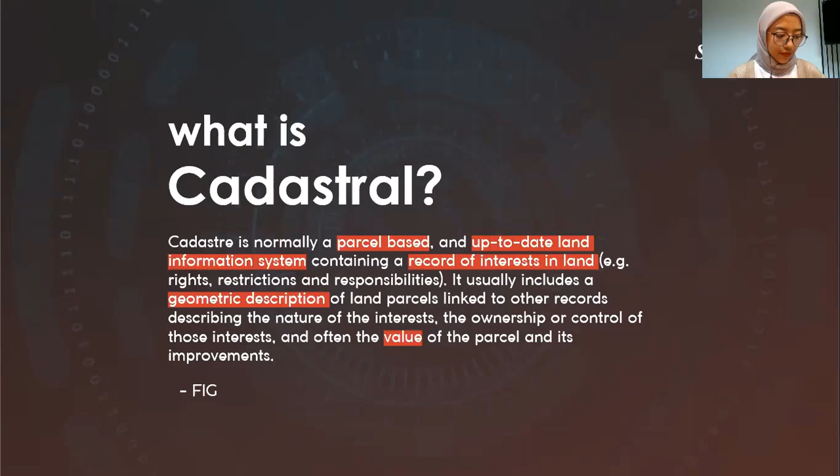So basically, in a nutshell, cadastral is about how you can keep information of your parcel, containing not only the geometric data itself, but also other important information such as the legal aspect. That's the first part about the definition of cadastral.

But the background of why we discuss this topic today is that during the last 2 centuries, population density has increased considerably, making land use more intense. This is shown by the number of population always increasing every year, and this trend has an impact on the increasing need for housing.

Humans also adapt by carrying out building developments both up and down, not only for housing but also for infrastructure, as seen in the picture with subway rail stations and other infrastructure. It is said that most land administration systems today are not adequate to cope with the increasingly complex range of rights, restrictions, and responsibilities in relation to land.

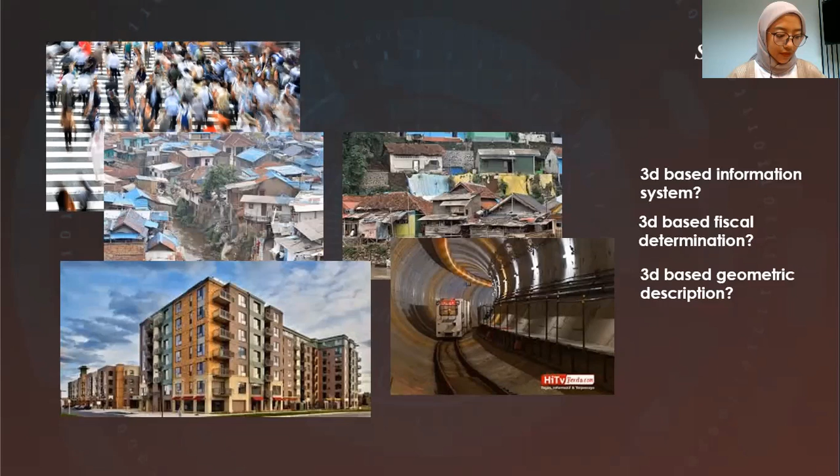Existing cadastres, which are still based on the 2D paradigm, need to be considered and adjusted to today's world, in order to answer emerged questions such as how we could cope with 3D-based information systems, 3D-based fiscal determination, 3D-based geometric description, and so on. That's why we need to move from the 2D cadastre to the 3D cadastre as well.

This will be our main discussion for today's topic. We will not discuss more about the theory, how to cope with 3D cadastre, or the legal aspect of 3D cadastre, but more on how we, as a GIS software provider, could give you a 3D digital cadastre model that will support your 3D cadastral concept.

This is our title for today's session: design and visualize 3D digital cadastral with SuperMap iDesktop.

The software we will use for today's session is SuperMap iDesktop, our desktop terminal product. But this one is special because we put our 3D cadastral plugin on it. You can find this product on our official website, but the one with the 3D cadastral plugin is only available in today's session.

For participants joining today's session, you could access this QR code. You could download our 3D cadastral plugin by scanning this barcode.

During the processing, we will use two different data sources. The first one is the drawing file, which is actually a floor plan drawing for each floor. Since we will create a 3D model, we hope you have your drawing file for each floor, not only for the first floor, so that we could achieve the 3D model.

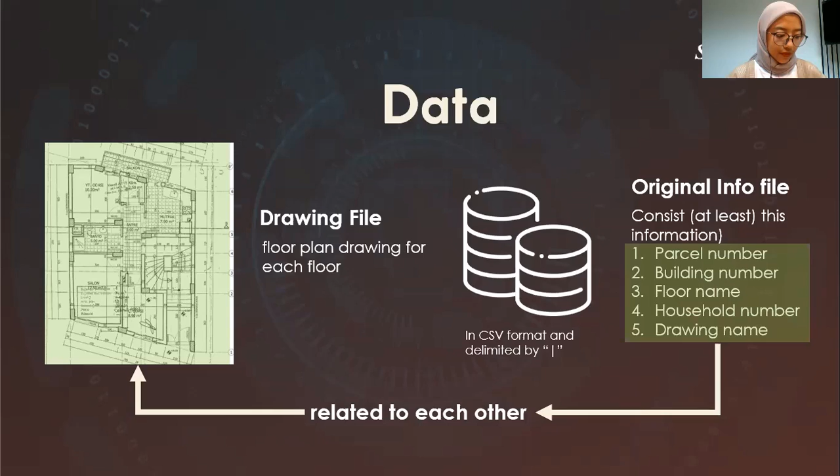The next topic is about the processing step. After you have prepared your data, we will do four processing steps. This is the general step, and after this I will show you the specific workflow for each processing step.

The first processing step is about data management. In data management, you will do data preparation and importing of the data. You need to make sure your data already fulfills the minimum requirements, such as having at least 5 pieces of information in your original info file, and that your drawing file is in TIFF format. That's all for the first data management step.

The second step is the digitization. After you import your data and make sure it fulfills the requirements and do some settings on it, you will go to the next step to do the digitization.

So here you will vectorize each object in your building, including the room, the roof, the door, the wall, etc. And you will also be able to put some information on it, the attributes for each object, such as in case you need to put the information of the legal aspect about the owner, etc. You could do that in this process.

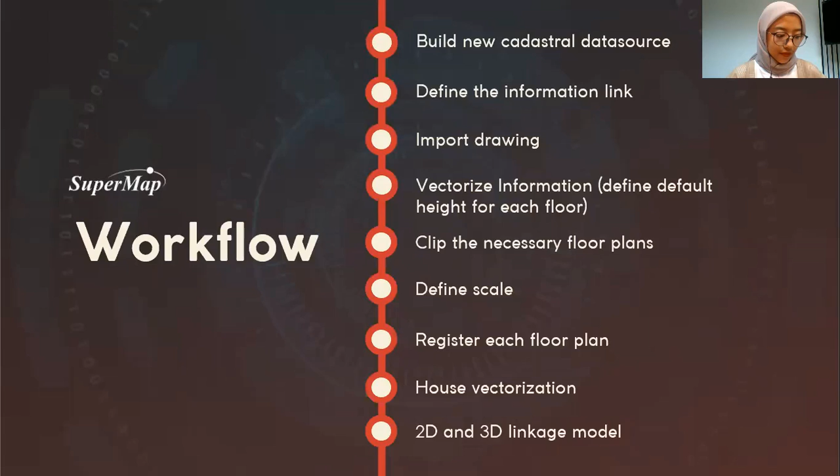Okay, but before I move to the SuperMap iDesktop, I want you to understand the data that we will use for today's session. I have explained to you about 2 data that we will use today. It consists of the floor drawing file and also the parcel information, or the original info file. The left picture is the drawing file that we will use today. It consists of 3 different drawings for the first floor, second floor, and third floor.

And you also need to have your parcel information that consists of at least these information: parcel number, building, floor name, household, room, and also the drawing. Please make sure that your drawing file is in TIFF format, and your parcel information is in the form of a CSV file, delimited by this vertical symbol, this one. And don't forget to make sure that your drawing file is in TIFF format, otherwise the software will not be able to detect your drawing file name.

Okay, so now we will go to the SuperMap iDesktop. I hope I could successfully share my iDesktop screen. Okay. So this is SuperMap iDesktop. We have used this from the first SMC until today's SMC, but what makes it different is that this iDesktop has the Cadastral Vectorization plugin, this one, which you will not be able to find in the usual iDesktop that we have shared on our official website.

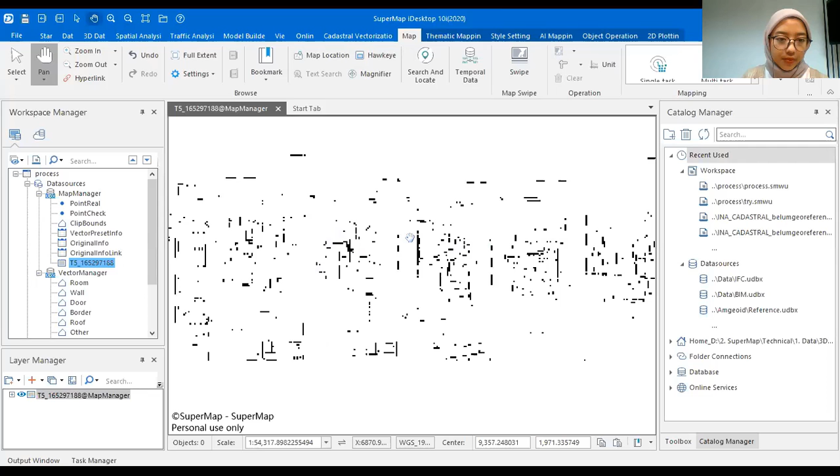Okay, next I will show you how our drawing file looks like. Okay, this is how the drawing file looks like. Actually, this drawing file doesn't only illustrate the first, second, and roof floor drawings, but it actually has the underground drawing, the first floor, second floor, the roof, and then the horizontal section, and etc. But for today's session, we will only use these 3 drawings.

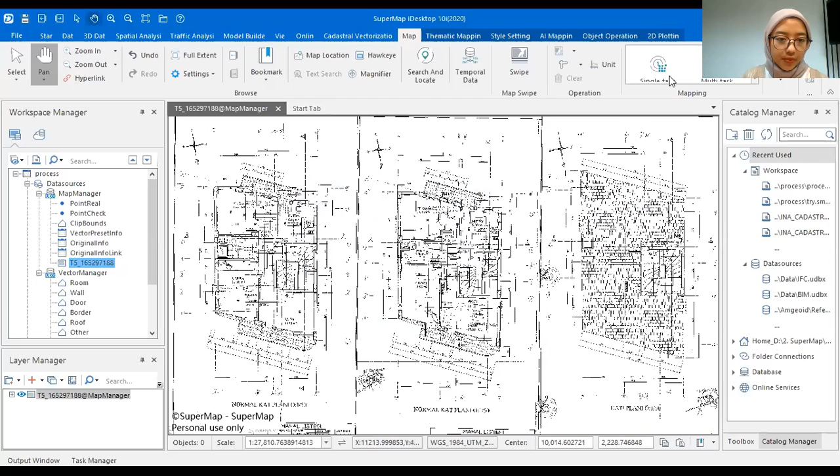These 3 drawings are for the first floor, second floor, and the roof. So it should be for the first floor, second floor, and the roof. Not floor, just the roof. And then, since we only use these 3 parts of this picture, not the whole picture, we need to do a clip process on it.

To do the clip process, we have the drawing clip region function here. I think we could just close this map and start drawing the clip region. If you click the drawing clip region, you will be asked to define what parcel number and what building number you're willing to modify, to draw the clip region on. And since we only have one drawing file here, it will only give you one option to select. And then you can click OK.

As the process completes, you will get this map, the map clip bounds map. This map clip bounds has been created by the software the first time you successfully build the data source. And here, if we open the drawing clip function, it will open the map clip bounds map. This map consists of three layers: the clip bounds, the thematic layer of the clip bounds, and also the drawing file itself.

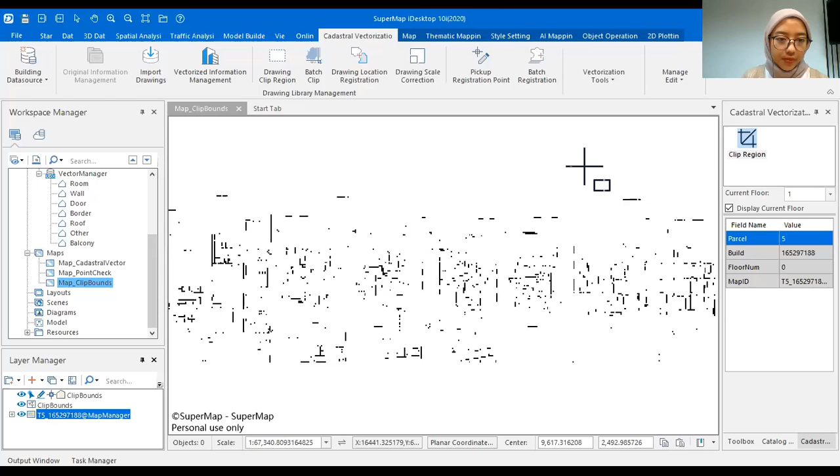And now we will be asked to draw each region. It's for the first floor, for the third floor, and for the second floor. If you remember, the software detects the third floor as the roof, right? So when we draw the third floor, it should be the picture for the roof.

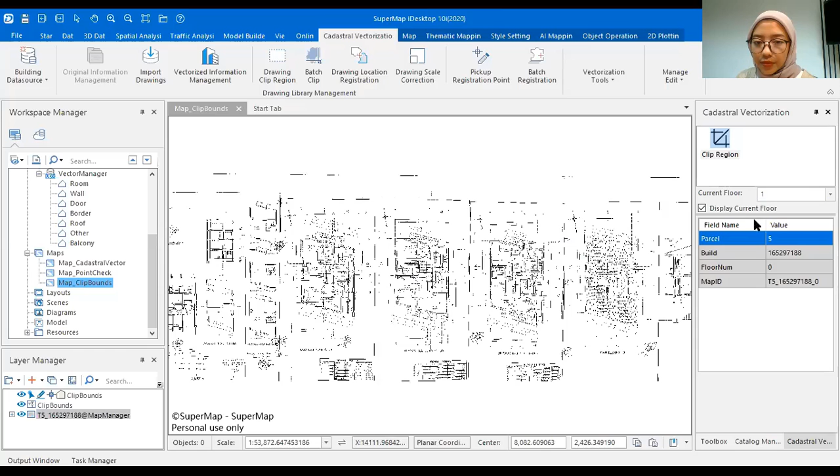But for now, I will draw it sequentially, starting from the first floor. It should be here. Just draw an area of the drawing file for the first floor, and when you finish, it will automatically move to the next floor. Here, I will draw for the third floor, which is the roof, and then the second floor here.

If you have completed your area drawing, you can right click in the map and uncheck display current floor, and you will be able to display the whole floor clip area. This is for the first floor, second floor, and the third floor is for the roof.

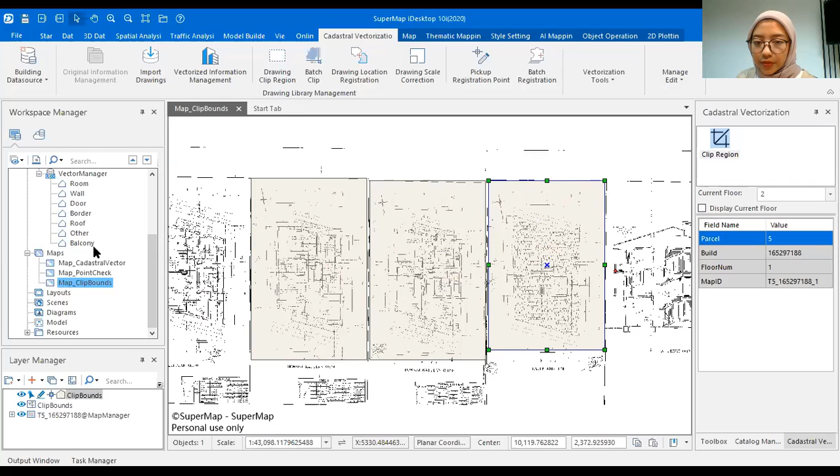Next, the objective of this processing step is to do the clip processing for our drawing file. So next, we will do the batch clip, and we are asked to add the base map. The base map is our drawing file itself. Click OK. For the clip region, we clip our drawing file with these three boundary areas stored in the clip bounds dataset. Then click OK and wait until the process completes.

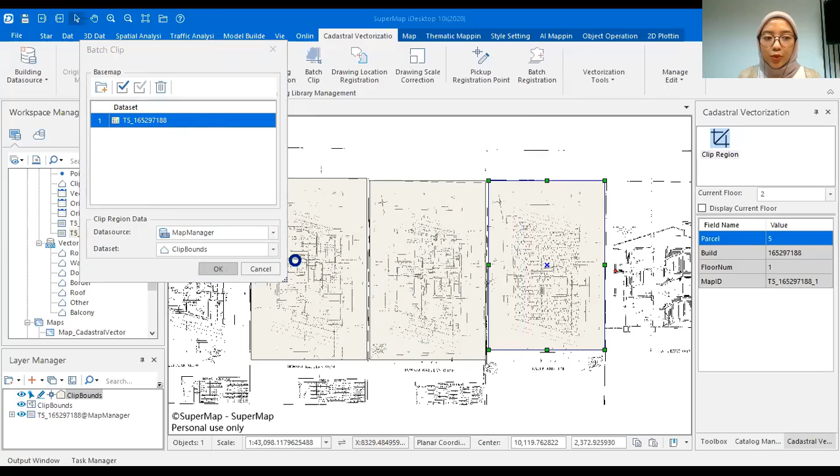After you do the batch clip process, you will get these three data. Maybe I will show you how the result looks. It will show you like this. This is 0. 0 is for the first floor. This is 1, which is for the roof. And 2 is for the second floor. So after we do the drawing clip region, we are able to get three different pictures for each floor from our drawing file. It separates your drawing for each floor.

Next, as you can see here, even though the data is in TIFF format, it has no spatial information, no location information. So it is very important for us to do drawing location registration. But since for today's session I have no data that could give me the location information of this drawing file, I will skip this and go to the next step, which is the drawing scale correction.

Since in the first process we defined our drawing file in the projected coordinate system, it will put it in an area located in that projected coordinate system randomly. That's why we need to define the scale correction here, because the scale of this picture is set randomly.

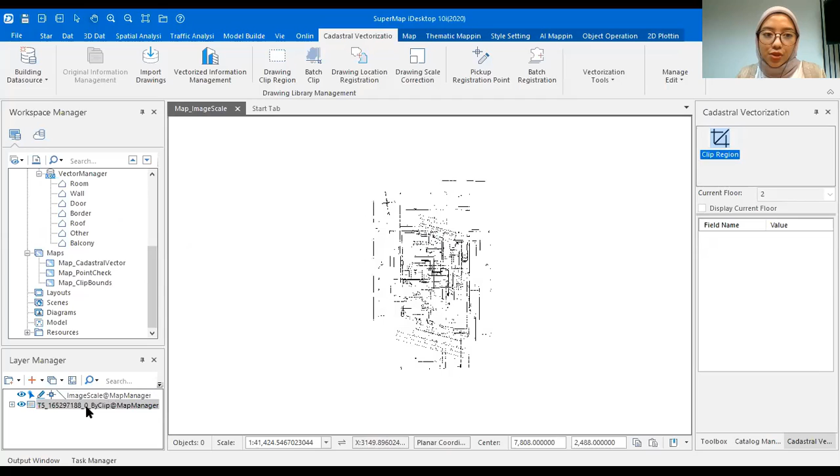To define it, you use the drawing scale correction, and it will take you to this new map, the map image scale, and it will automatically import your image scale dataset and also your drawing file. The one with the 0 mark should be the first floor.

And how to define the scale, how to correct the scale, is in the drawing file. Commonly we could have the information of the scale itself, such as here, as you can see. Actually, the number 150 for this line means that this line has a length of 1.5 meters. So we could just draw a line for this part, for this 1.5 meters, and then you find that this line that I have drawn before

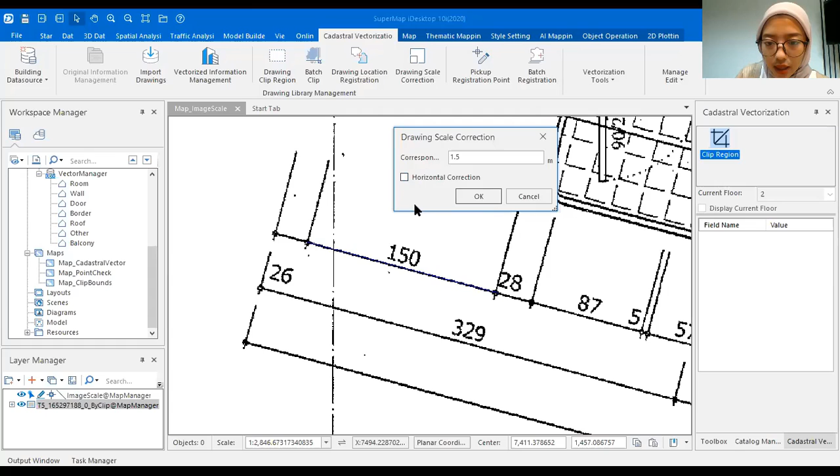has a length of 1.5 meters. And I will uncheck the horizontal correction, because if you check this, the result after you do the scale correction will rotate your original file. If you uncheck this, it will not rotate your file. And then click OK. I think I could close this, and now have a look at the result.

So after you do the scale correction, the file for the first floor, the one with this 0 mark, will be changed. Previously it should be 0 underscore by clip, right? But after we define the scale correction, it will be changed into underscore by scale. So this means that this picture for the first floor has been corrected. And now let's take a look at how it looks by adding it to the new map.

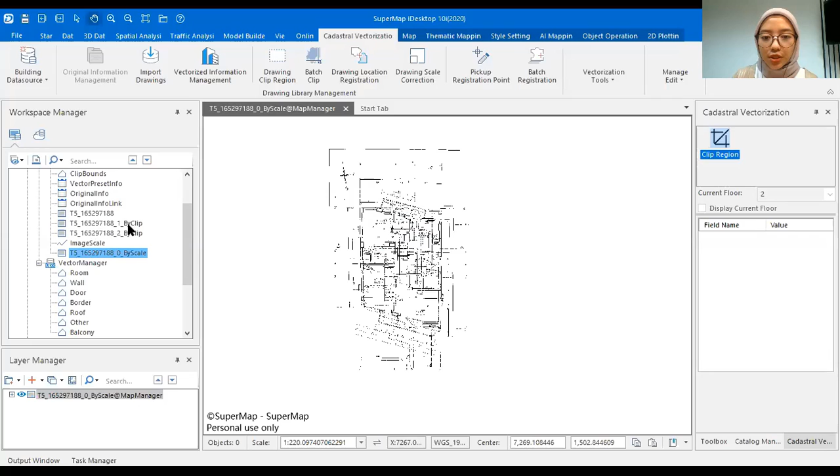Since previously when I did the scale correction, I unchecked the horizontal correction, the result will not be rotated. But if you check the horizontal correction, the result will be rotated, following your image scale drawing. Okay, this one is already corrected. Now let's take a look at how it compares with the other pictures that have not been corrected in advance.

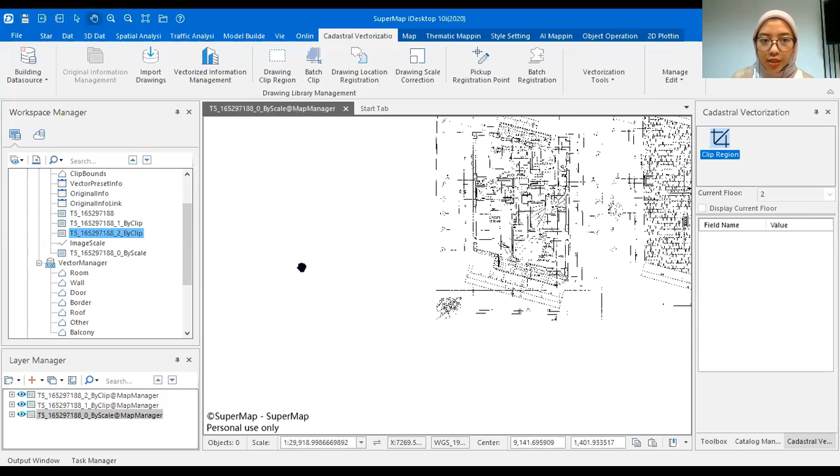So in the previous process, it should be located here, right? But since this 0 picture is already scale corrected by this scale correction function, it will be the only one that has a correct scale. So maybe I will show you again. This is for the 0 picture, and if I zoom in to it, it's located here, right? So it will give you a different scale from the others. So this 0 picture is already scale corrected, but the rest are not.

So to change the scale of these 2 remaining pictures, we will do the registration point picking. Here in this pick up registration point, we will not only correct the scale information for these 2 pictures, but also register each picture, so that we will be able to get a good location, a good position for each picture. So the final result should be these 3 pictures overlaid on each other. Okay, now I will just close it and go to the next process, picking up the registration points.

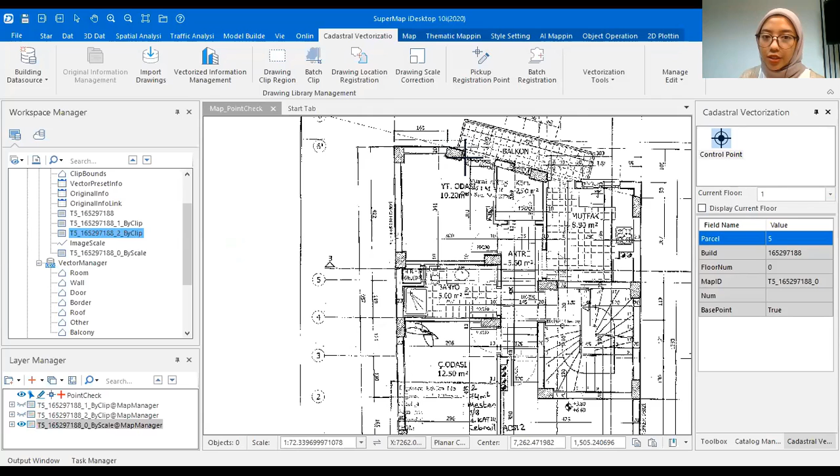Actually, this is a kind of image to image registration for these 3 pictures: 0 by scale, 1 by clip, and 2 by clip. And to do this pick up registration points, you will be asked to pick at least 4 points that represent the same location for each picture, such as here in my picture. The locations which are the same for these three pictures are here, and then here, this one, and this one. This is for the first floor.

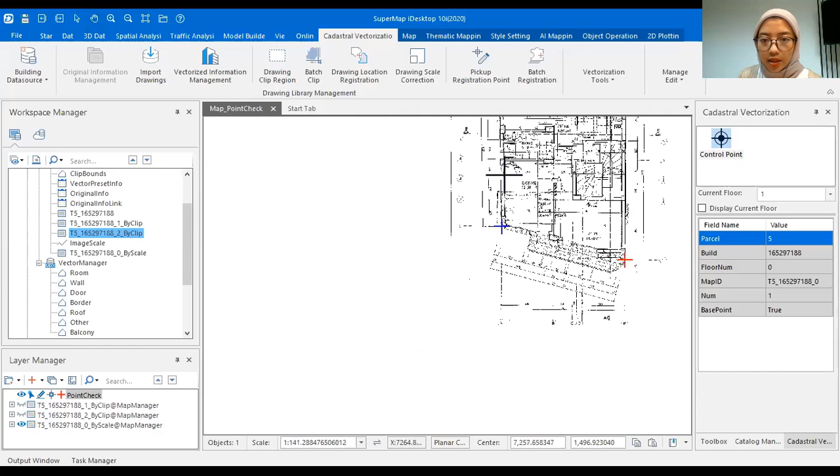Now we will move to the third floor. It should be located here. I hope you could do this digitization sequentially, the same from the first until the last picture, and then this one for the last. And now we move to the second floor. The point should be located here. This one, and the last one is this one.

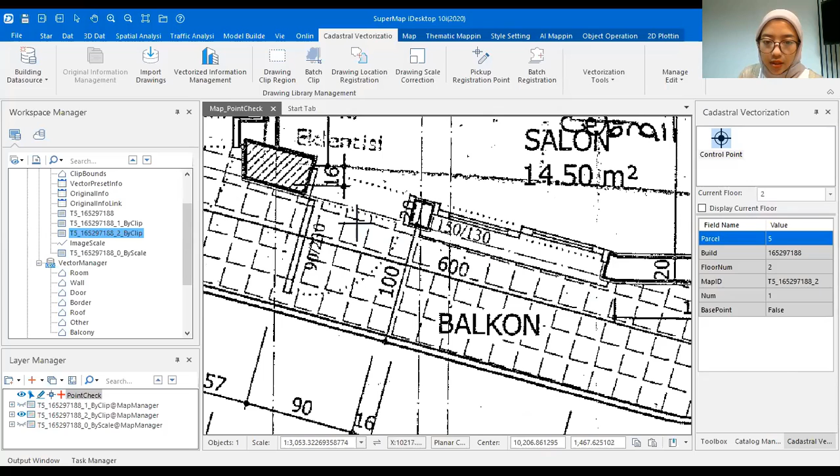So now we have already picked the registration points for these three pictures, so we know that each point is located in the same position in X and Y coordinates, but of course at a different elevation, because these three pictures are located on different floors, different elevations. And after you pick up the registration points, you could go to the next process, the batch registration.

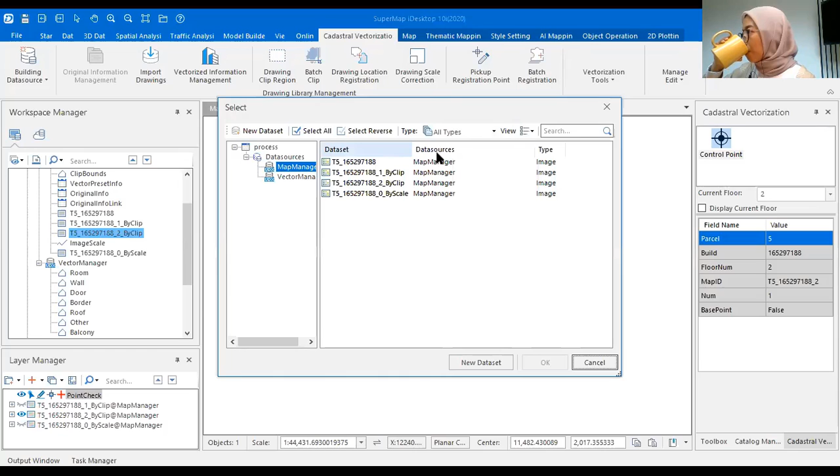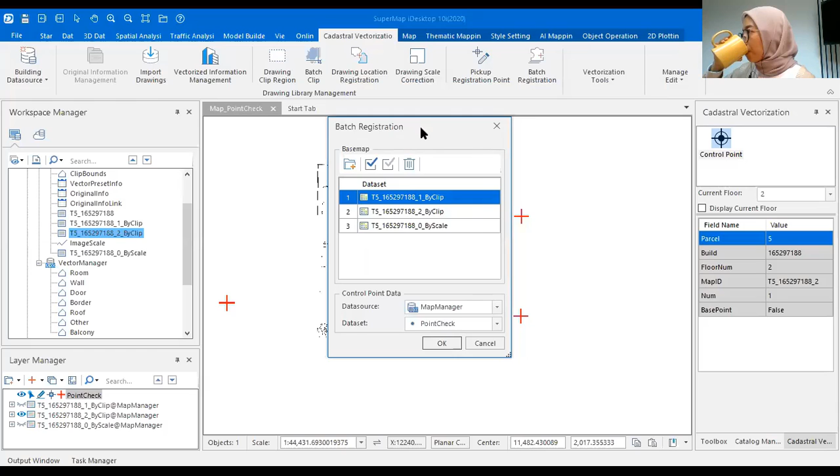In this batch registration, first you will be asked to add the base map. It should be the one that is already clipped or already scale corrected, these three pictures, not the original ones that we put in the first process. It should be the one that is already clipped and already scale corrected. And we will do this registration based on the point check, and then you could click OK.

And wait until the process successfully completed. And after you do this batch registration process, you will get these three different files. It should be the ones that are already scale corrected and registered to each other. Let's take a look at how it looks by adding it in a new map.

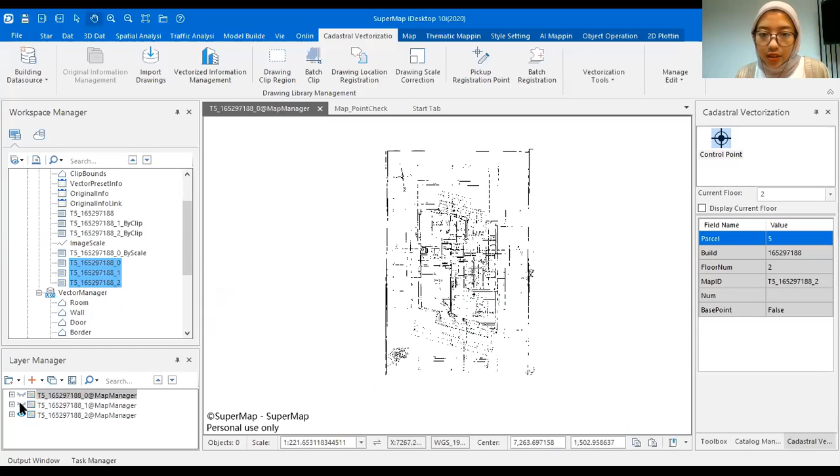All right, yeah, this is how the result looks. So I show you, this is for the second floor. I think this one is for the roof. This is for the first floor, second floor, and this one is for the roof.

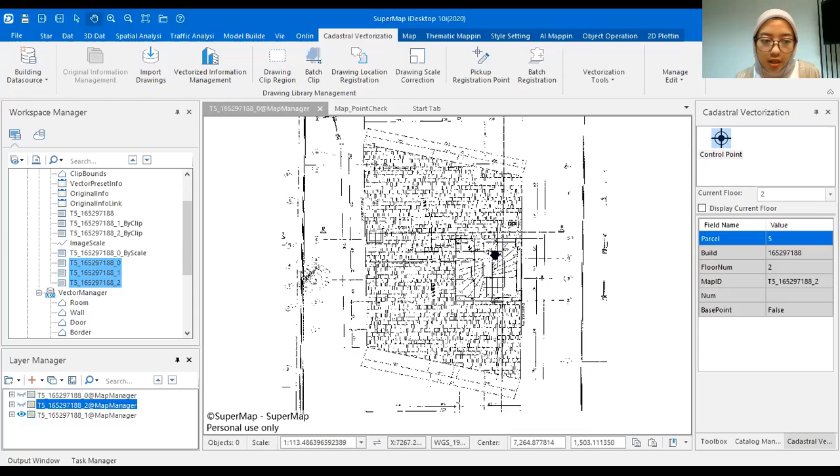So it's already scale corrected and also already registered to each other, so that as you can see here, each picture was overlaid on each other. It's already located in the same X and Y position, but since it may have a different elevation, we will define that in the next process.

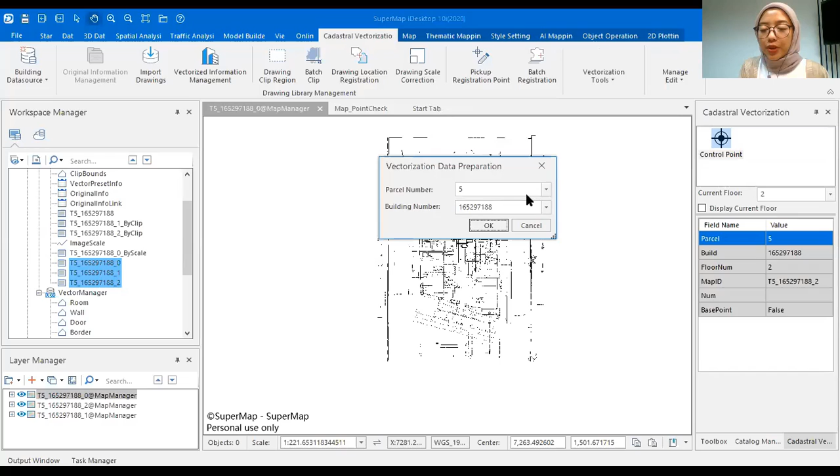Okay, after we do the registration, the next is about the house vectorization. You could go to the vectorization tools and you will find the house vectorization. You will be asked to select what parcel number and what building number of your drawing file, and then click OK.

And you will find this map, cadastral vector map, and it already has different objects for this layer, including the room, the door, the wall, roof, border, other, and also the balcony. And we will do some digitization for this.

So actually how to do that is, first in the cadastral vectorization window on the right side, if you click on room, the pen editing tools of the room layer will be activated. If you click on door, it will activate the door editing pen tools, and also for the wall, as you can see here, the outer contour is for the border, roof, other, and the last one is the balcony.

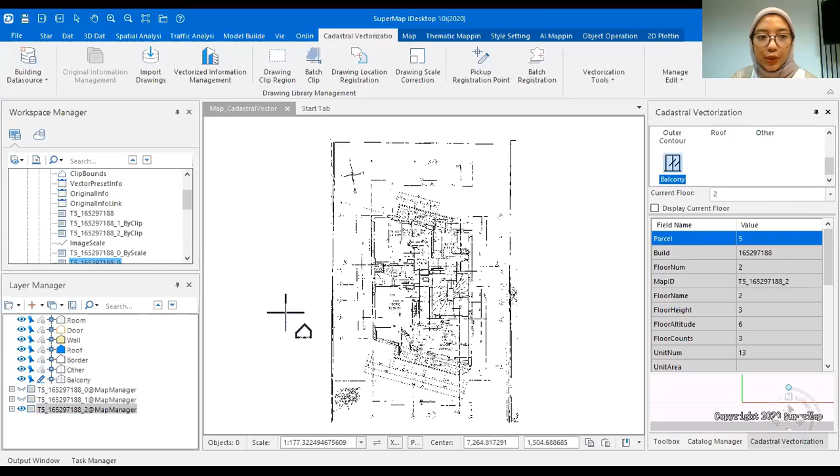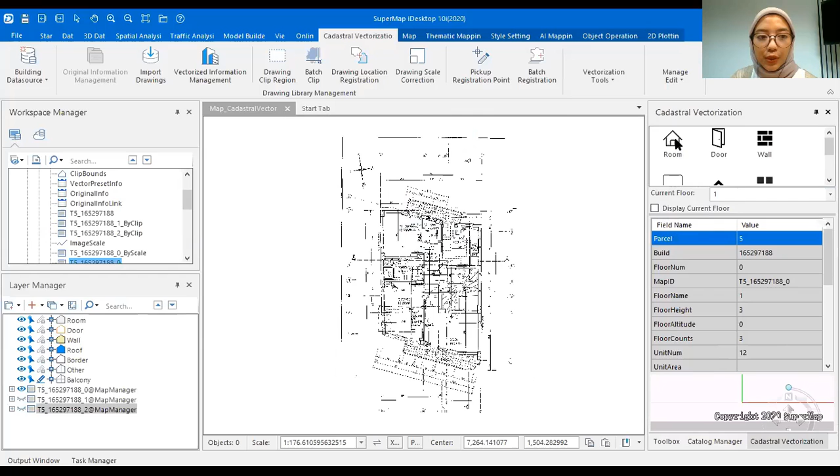Okay, now I will show you how to digitize. And you're also able to change the floor. So first, I want to do the digitization for the first floor. Here, I choose the first floor, and I will digitize the room.

You could just digitize. I think I made it wrong. It should be here, here, here, and right click when you finish. This is, we already digitized the room, and then I will digitize the door, which is here. And then digitize the outer. I think this takes time.

Actually, I have prepared the data where I already did this digitization process in the previous session, because this may take a long time. So I will show you directly how my result looks. So this is how the result looks. I think I will delete my wall first because I want to show you how to create the wall.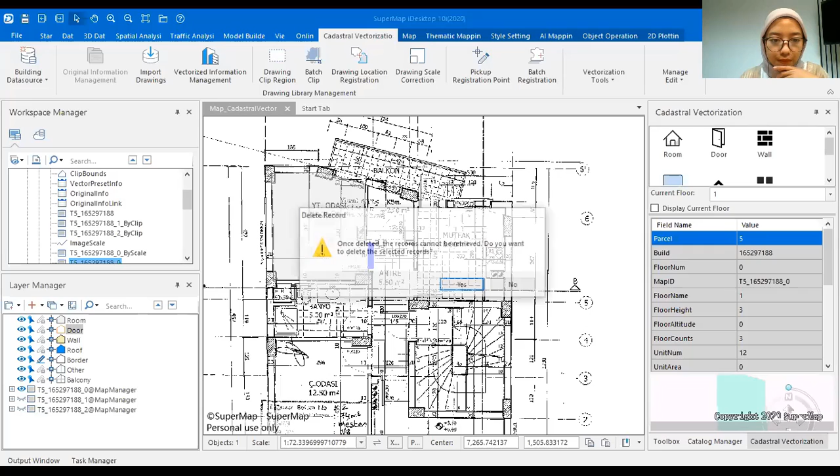Okay, here I have prepared my data and I have done the digitization for the room. Here I have digitized the room. For the balcony, I also assign it as a room, but I will also draw the boundary of the balcony here. This is the boundary for the balcony. This one. And this one. It may not look so clear. This one.

And after that, besides that, I also have digitized the door. So look at it here, the one with orange color. This one. This one. So this one. And digitize the door.

And then the border. So actually the border is the boundary of your home, the boundary of your building, and I have not included the balcony in the border, only the border of my main building. This one, this is the border. Why I created this border is it will help me to obtain the wall, I will show you later.

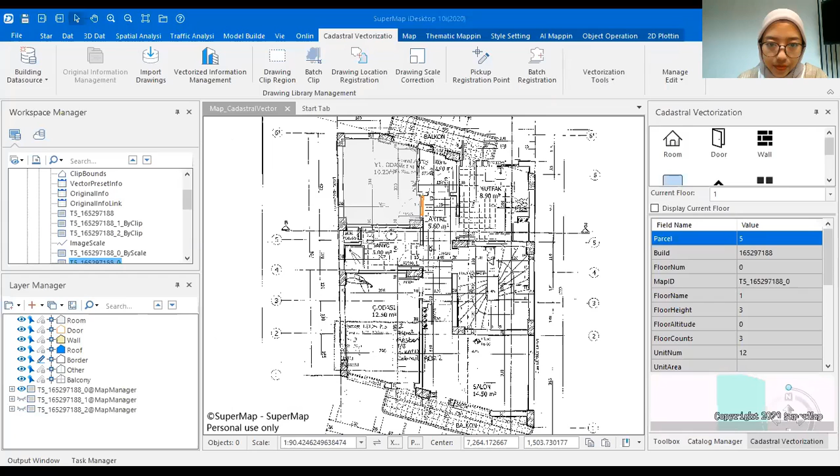Okay, I think I have not shared my other screen. I'm sorry. So I will repeat my explanation.

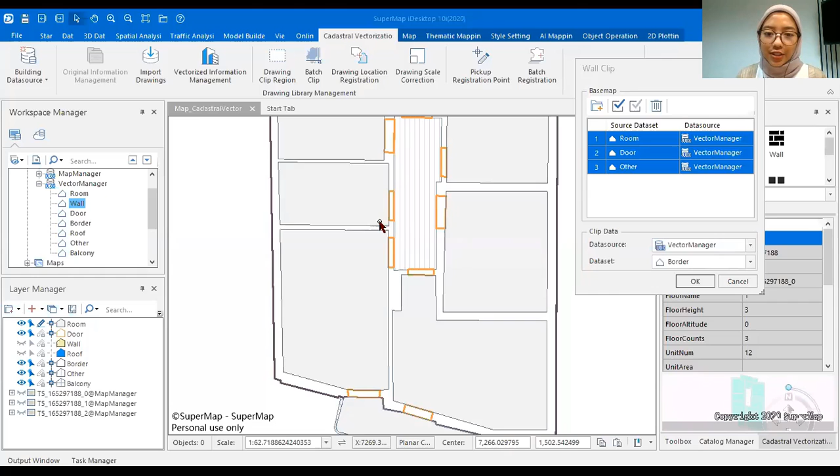For the prepared data, previously in the different iDesktop, I showed you how to digitize the room. Looks like I need to re-explain it from the start. I have prepared the data - I have done the digitization for the room, for the other room, for the balcony, for the outer of my building, for the door, and also for the outer of my balcony.

Maybe if you want to have a look here, this is that I have not created my wall yet, because to create the wall, we have the wall clip function. This wall clip function will help us to do the clipping between the boundary of our building with the building inside of it, so that it will give you the remaining area that will be categorized as the wall. So now let's take a look how it looks like.

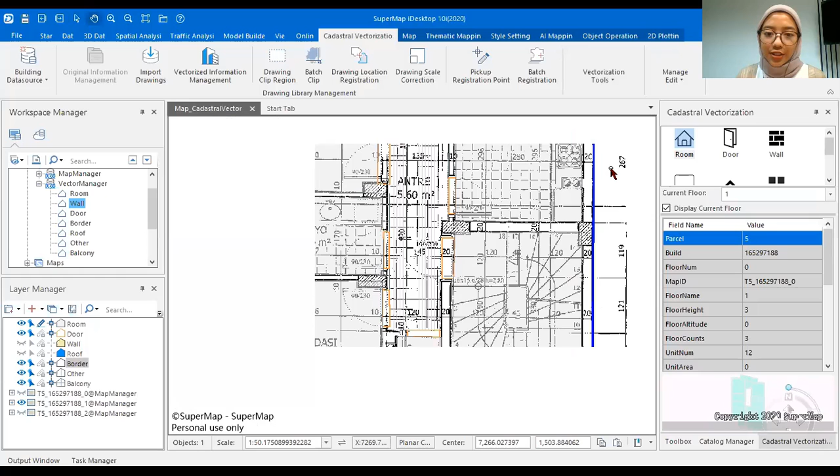Here I will clip my room data set, my door data set, and my other data set. Other data set means that this one - it means that this one, the one not categorized either as the room, either as the door, either as the wall, etc. Because this is kind of just a free space, so that's why I categorize this as the other.

And the border is the boundary of my building, only the main building. The balcony will not be included under this border.

Now I will let you know how the wall clip function will be useful for us to create the wall. So here we will do the clipping for the room data set, door, and other, and clip those data with the border data set. And now how it will look like - we will get our wall.

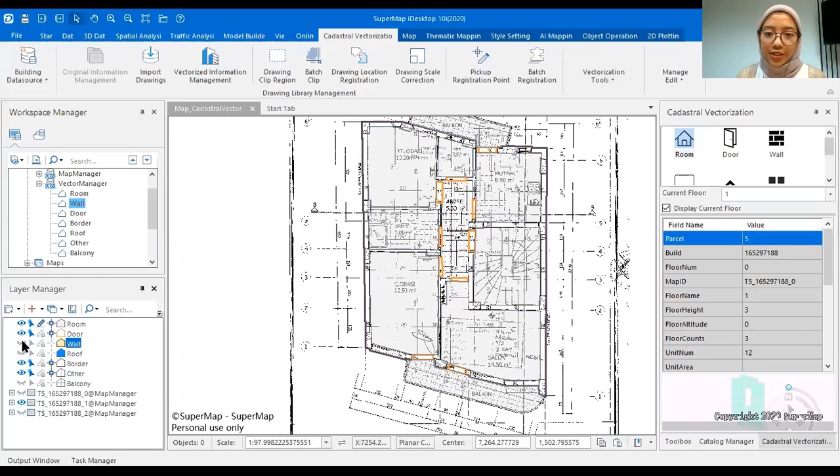This is the result after we do clipping between our border data set with our room, door, and other data set. So we do clipping for this data and it will show you this result.

Next, we could just copy this result for another floor. For some cases, the building has similar locations for each room on each floor, so you could just copy this digitization, this vectorization result, for each floor. But if your building has a different room location for each floor, of course you need to do further digitization for that different floor. But because of limited time, I just want to do the copy floor.

So we have the copy floor function here, and I will copy my room, door, wall. I think no need to copy the border, and also I will copy the other data set - these 4 data sets. I will copy that from the start floor until the first floor, meaning I will do this copy one time only, and click OK. Now let's take a look how it looks like.

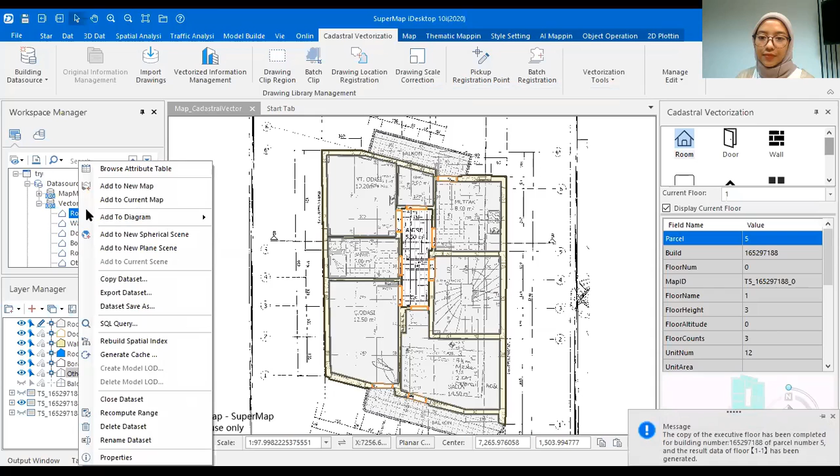So yes, here I copy my room for the first floor, and actually, even though this floor name is 3, this is actually for the second floor.

For the floor altitude, it should be 3 meters, because we already defined the floor altitude as 3, right? For the bottom floor, the floor altitude is 0, but since the height is 3 meters, the next floor altitude should be 3.

And now let's have a check for the wall. Floor height is 3, floor altitude is 3. I think that's correct. And then let's take a look for the door.

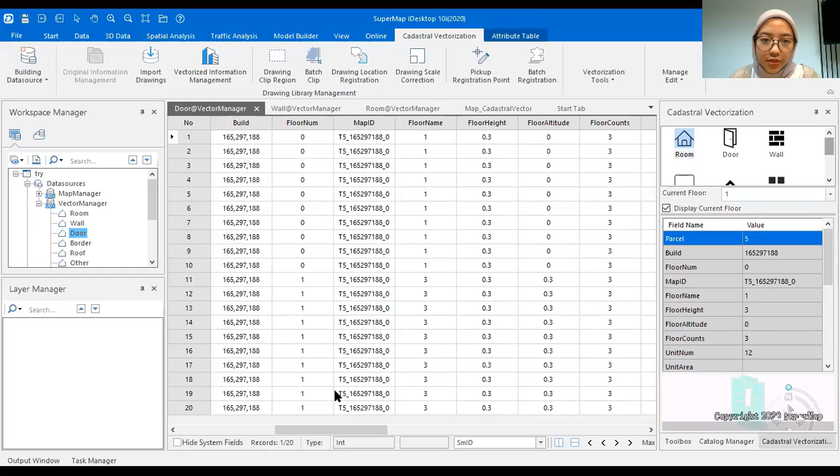It has copied the door for the 0 floor and the first floor. And in the floor altitude, it should be 3 for the second floor. And then for the border, we don't need to do any modification.

And then for the roof, the floor altitude should be 6. That's correct. And for the other data set, the altitude is 3 - yes, that's correct. For the floor height, I think I could define it as 0.3.

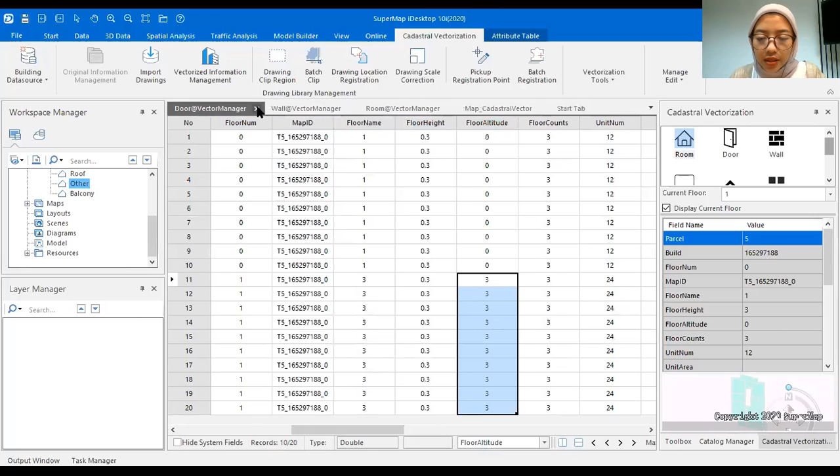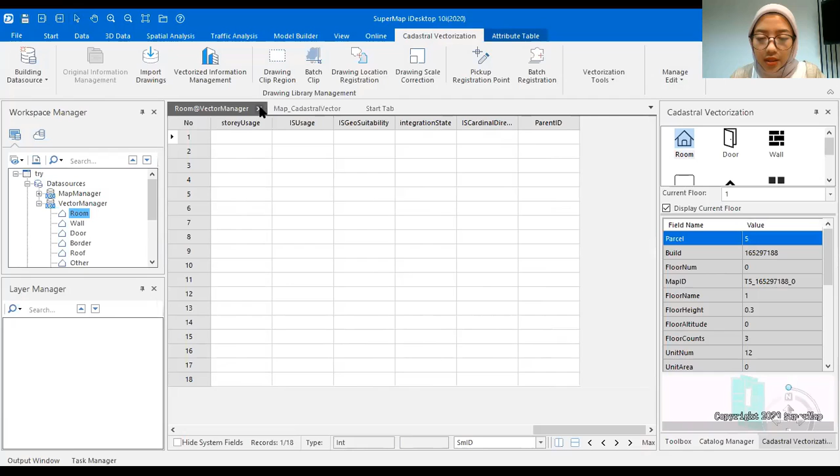Altitude is the elevation. Floor height is just the height for the object. Okay, now I will close this attribute table and go back to my model and to my cadastral vector map. So previously we have defined the height, and also we have vectorized the cadastral information. If you're willing to put some information for each room, for example this room, you could just open its attribute table.

Okay, next after we digitize for each room, after we make sure the height information for each room is correct, and the elevation for each floor is correct, you could go to the next process, which is the 2D and 3D linkage editing. The main objective here is to stretch your 2D data in order to obtain the 3D model.

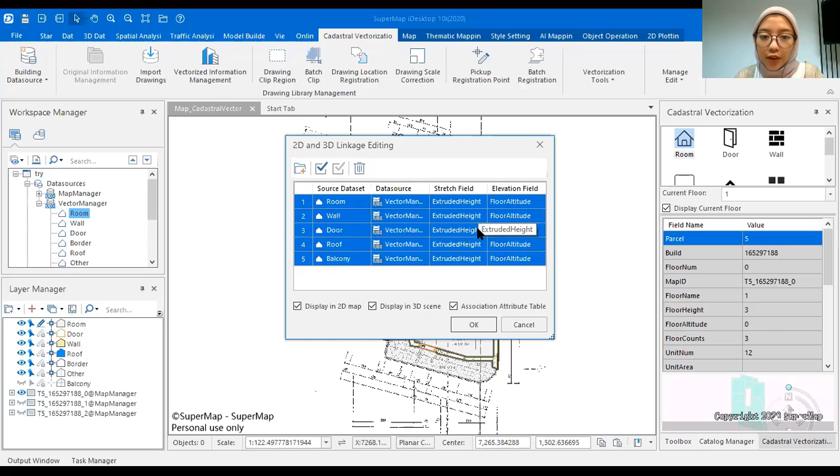And here we need to put what height information we could refer to in this stretch field. I think I will go back to open one of the attribute tables of the data set under the vector manager, such as this room. So here we will do stretching based on the floor height, because the height information will define the height of the object, while the altitude will define the elevation of the object. So it will be different.

For the first floor, the elevation should be 0. For the second floor, since we define the height of the building as 3 meters for each floor, the altitude, the elevation, should be 3. And for the third floor, if any, it should be 6. For the fourth floor, if any, it should be 9, and so on. So that's the difference between floor height and floor altitude.

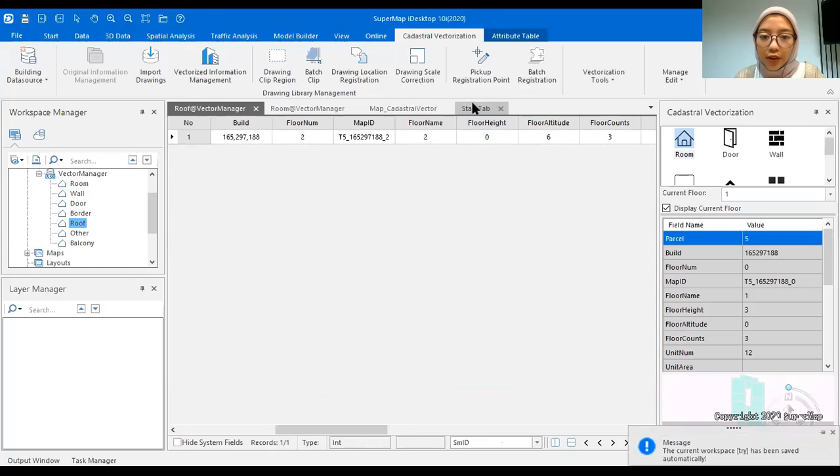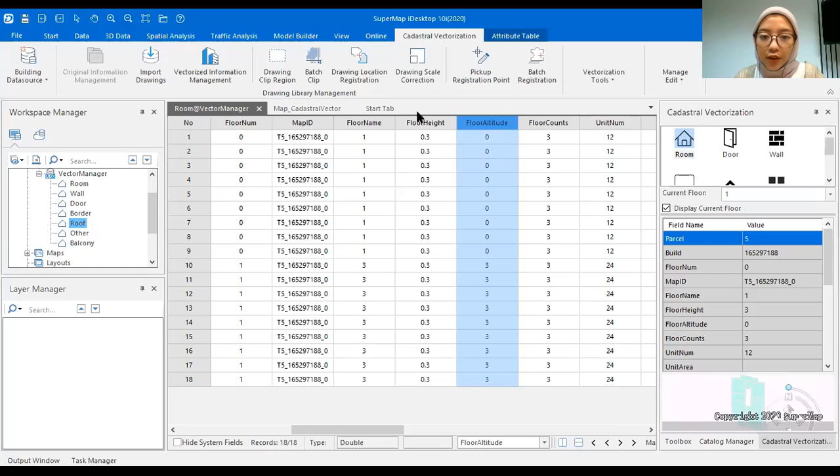And for the roof, I forgot to define the floor height, it should be 0. Oh, that's right. Okay, so that is the difference. Height is the height of the object. Altitude is the elevation of the object. Since we define 3 meters as the height of each floor, the altitude should be the multiplication of 3 for the floor number.

Now let's take a look how the 3D model looks like after we do the 2D and 3D linkage editing. Please make sure that you already define the correct field for the stretch field. It should be floor height. Okay, and click OK.

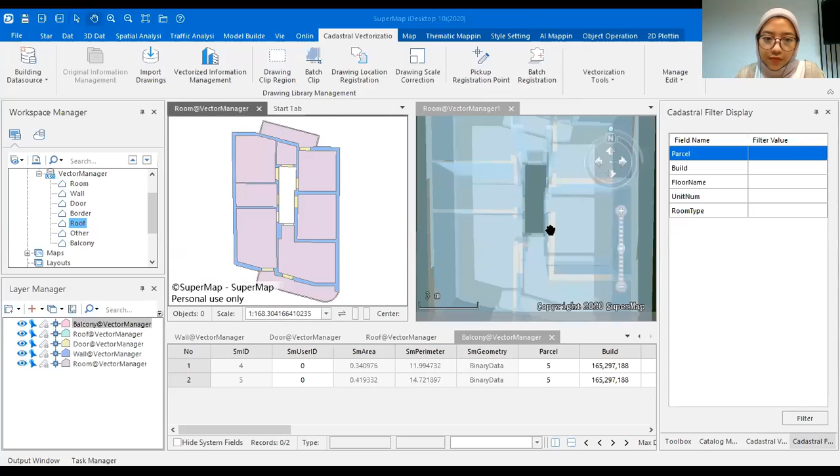And this is how the result looks like. I think I have not copied the balcony. Okay, I will repeat the process. The balcony, I will copy that from the first until first. And let's take a look. Yes, it's already correct here. The altitude should be 3.

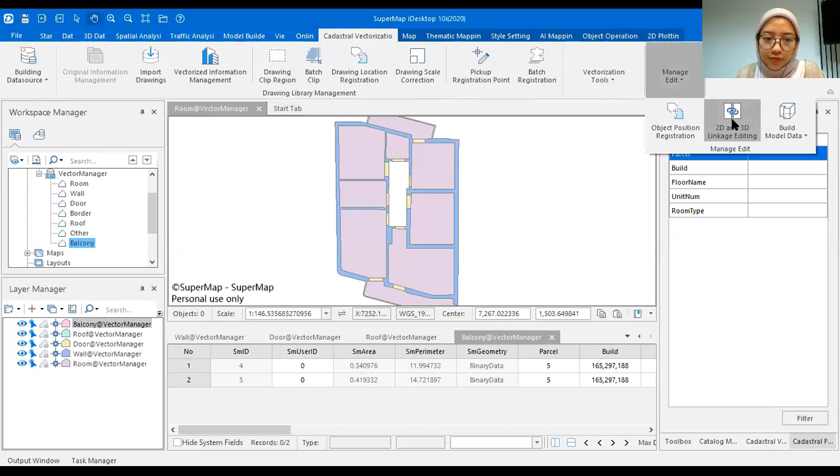Okay, now let's take a look how the result looks like by 2D and 3D linkage. Don't forget to change the stretch field to the correct one. I put it in the floor height. And click OK when you have made sure you already define it correctly. And yeah, now we will get this result.

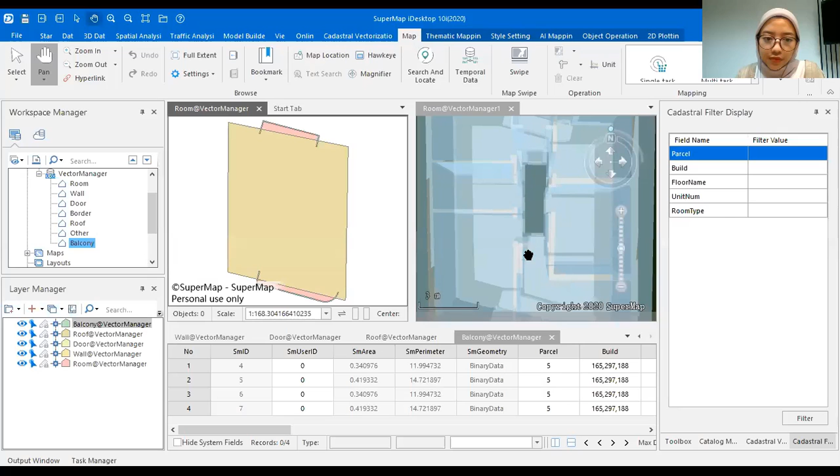So maybe because of the limitation of the teleconference, you will not be able to see it smoothly, but actually on my own computer, I can get this movement of the 3D model smoothly. Maybe I will show you one by one, layer per layer.

This is how the room looks like. And then the door. The roof, the balcony, only the fence of the balcony actually, and the wall.

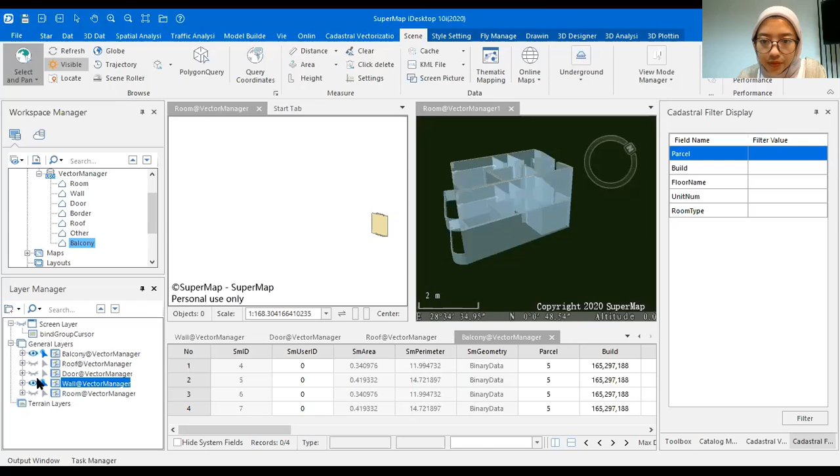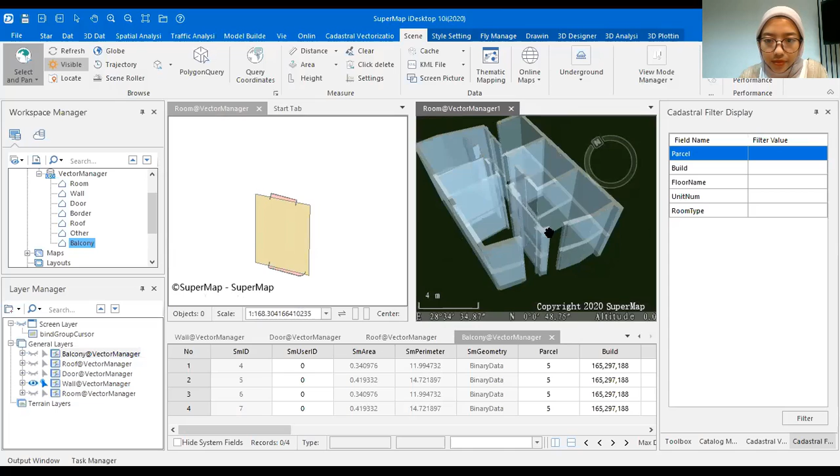Here I define the same position of room for each floor, just as an assumption. But in case you feel like you need to redraw it because the position of the room for each building, for each floor, is different, you need to draw it manually for each floor. But today's session is just an example. I will show you how to copy the floor. Got it. Okay, this is the result.

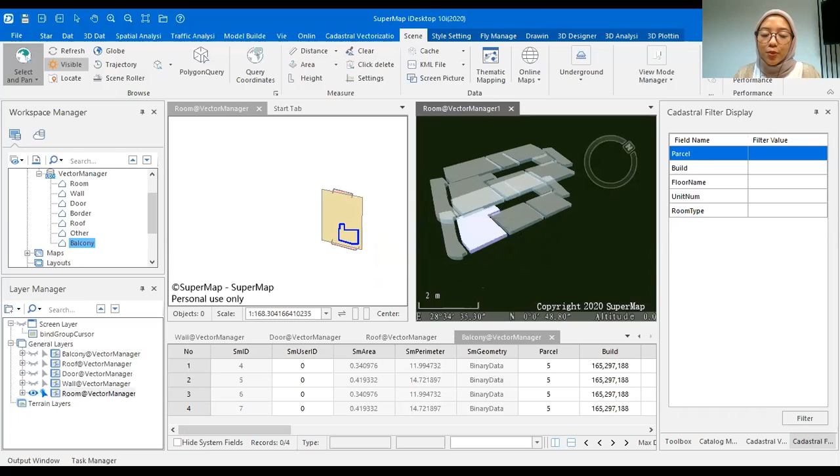Another important thing to know is that one of the more important pieces of information in 3D cadastral making is putting the legal aspect information for each building. There may be a different authorization for each floor, a different owner for each floor, so you could put it here. So for example, I'm going to give further information for each room. I'm going to put owner information for this room and all of the rooms. We're able to do that by adding a new field for this room.

You could right click in the room properties, and in the attribute table, you could add a new column, new field, namely for example owner, and the type should be text. Click apply. So now we have a new field, namely owner, and here we are willing to put the owner information for this room.

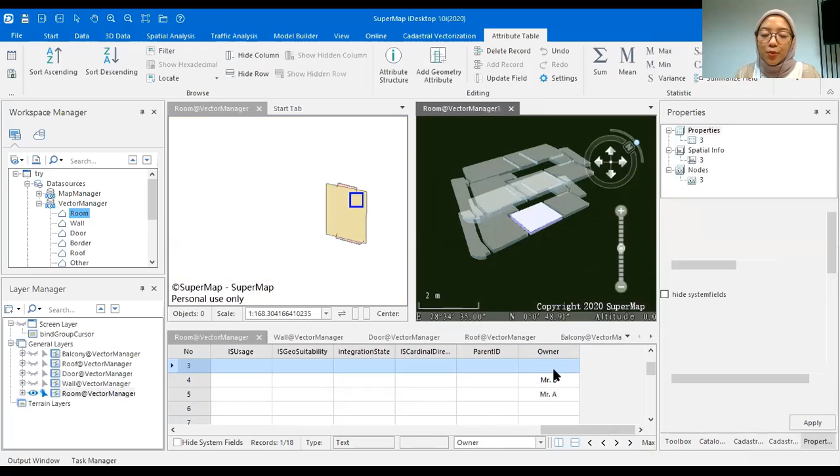For example, we're willing to put the owner as Mr. A, and then for this one the owner is Mr. B, and this one the owner is Mr. C.

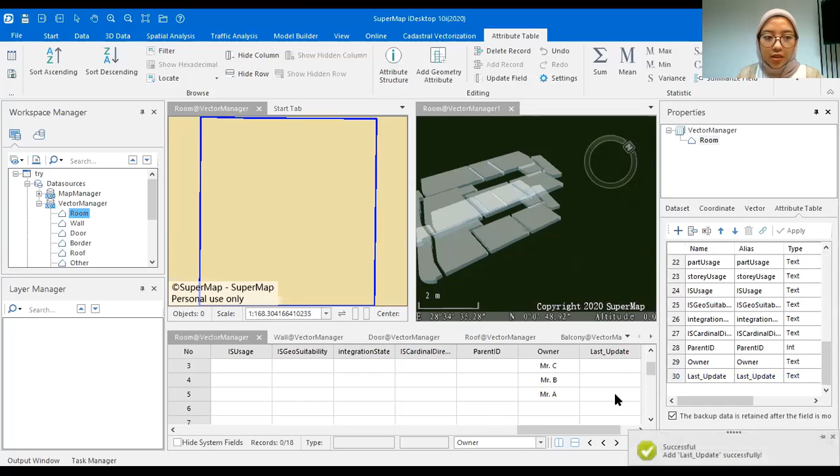Or maybe you're willing to add another piece of information, not only the owner, but maybe the last update information, etc. You could do that here. For example, this one is November, etc. You could add further attribute information for each object within your building.

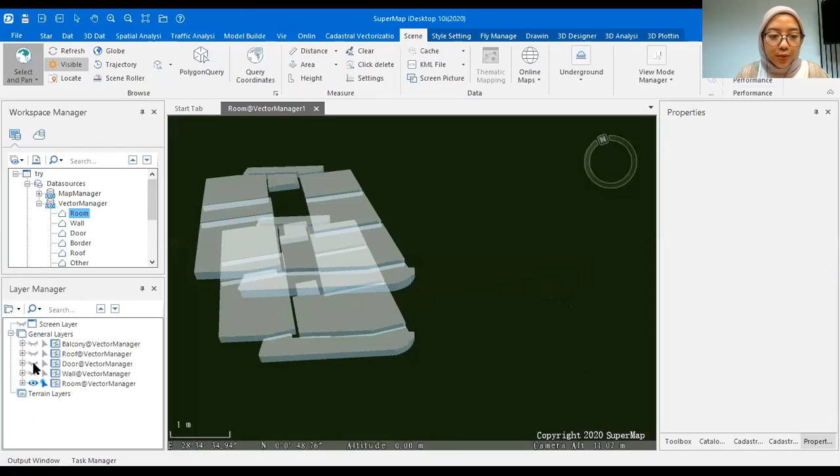I will show you more detail about this 3D cadastral model. This is for the room, this is for the door, for the wall, for the roof, and also for the balcony.

So now another question emerges: how to export this 3D model? We provide a function for this. Under cadastral vectorization and manage edit, we could build our 3D model. I would like to export this model one by one, per object, starting from the room only. Make sure you select the correct stretch field.

Model room. Then the second one, I will build the model for another layer, the wall. So I will delete the rest and only export the wall, because I'm willing to do different styling for each object model. If you convert all of them into one model, it will be hard to change the layer style. I will show you later.

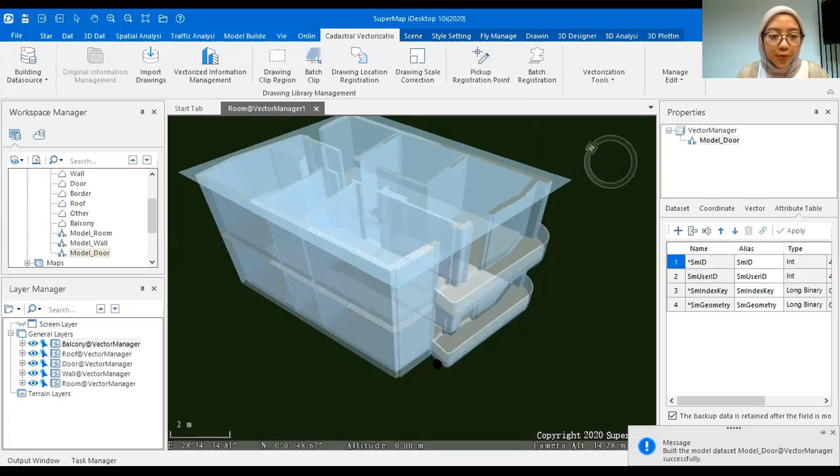And then for the balcony, room, wall, door, and other first. For other, the stretch field is floor height, because we put the height information in the floor height, right? The result data is in the vector manager with the name model for other.

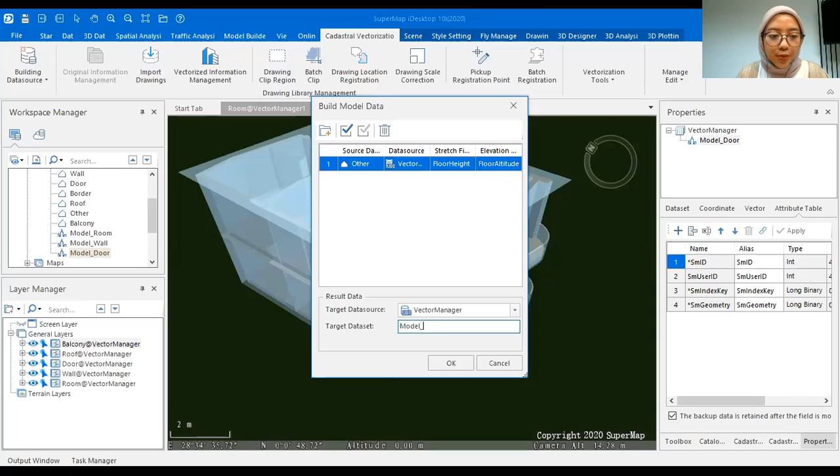And then the next one is for the balcony. I will delete the rest and only keep the balcony, and the stretch field is floor height. The result data will be stored under the vector manager data source with the name model balcony.

Model balcony. And the last one is to export and build the model for the roof. For the roof, it's quite different because we will use the build pitched roof function, which allows you to define the slope in the parameter setting, so you get a sloped roof with the floor altitude information applied.

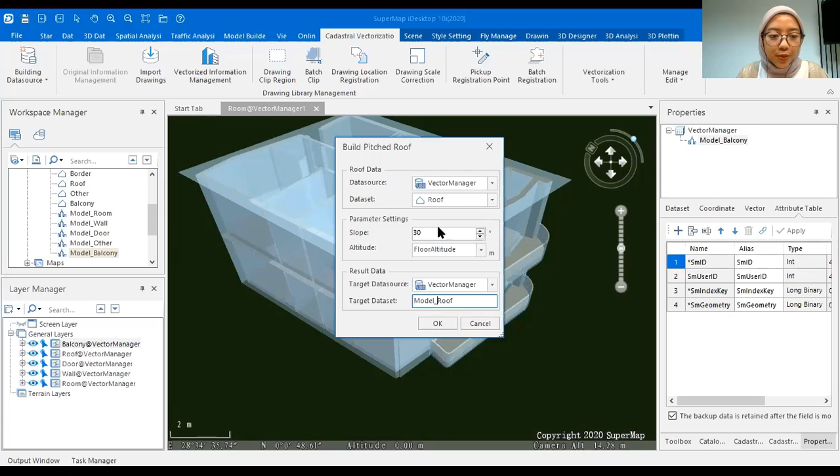So I will just let it default, maybe give an underscore here for the roof name, and I will not change the slope number for my roof. Just click OK, and now let's take a look at how the model result looks.

If I open it in plane scene, I think, and you're also able to open it in the spherical scene. Just want to show you in the plane scene. Actually, it's not clear enough, right? Because the model will automatically be in white color.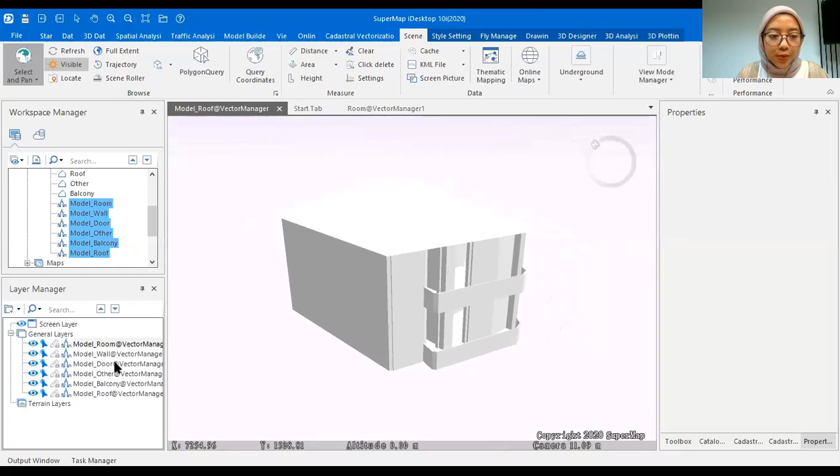But now I will show you how to give a different color for each object. Okay, first I will change the color for the roof. You could click on your model roof here and go to the style setting.

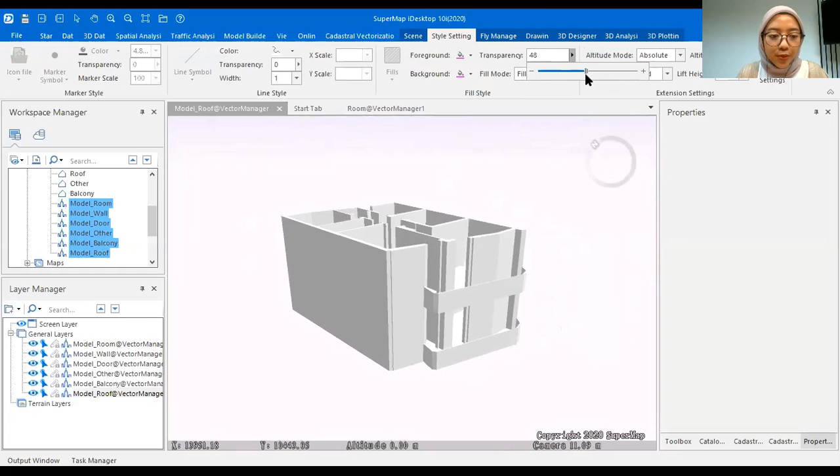Here we will be able to change the color. This time I will change it into gray, I think. And also you will be able to change the transparency. Let's suggest this one.

And then I will change the color for the room, such as red. This is how the result looks like for the room.

And then the color for the door, maybe yellow.

And then the color for the balcony, maybe blue.

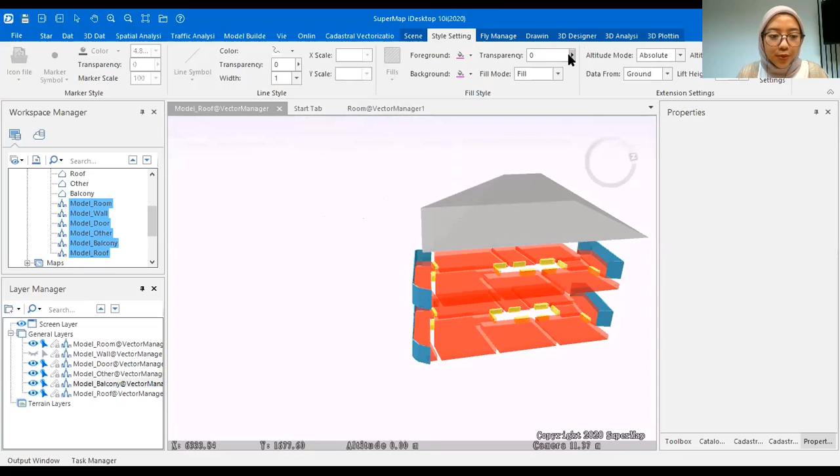And the last one is for the wall. I will give you green.

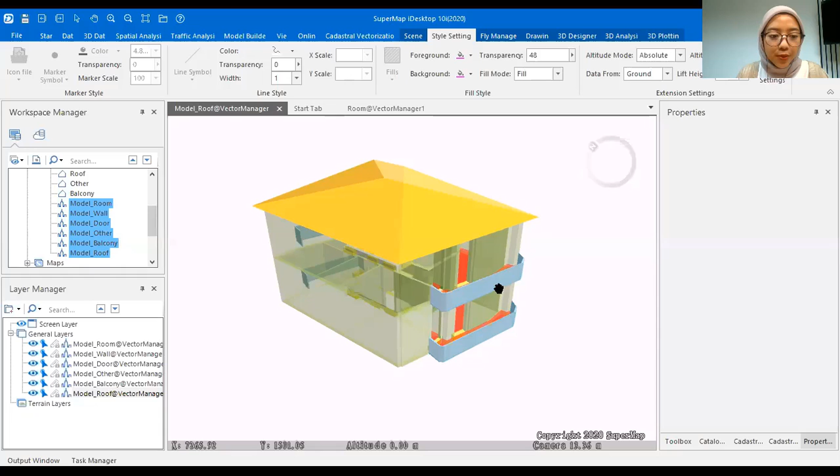Okay, I think this is the final result of our building. Of course you could make it more beautiful in case you have some different requirement about the color for each object. You could do that by changing the color of each layer in the style setting. In the style setting here, you can change the foreground, the background, the transparency, the fill mode, etc.

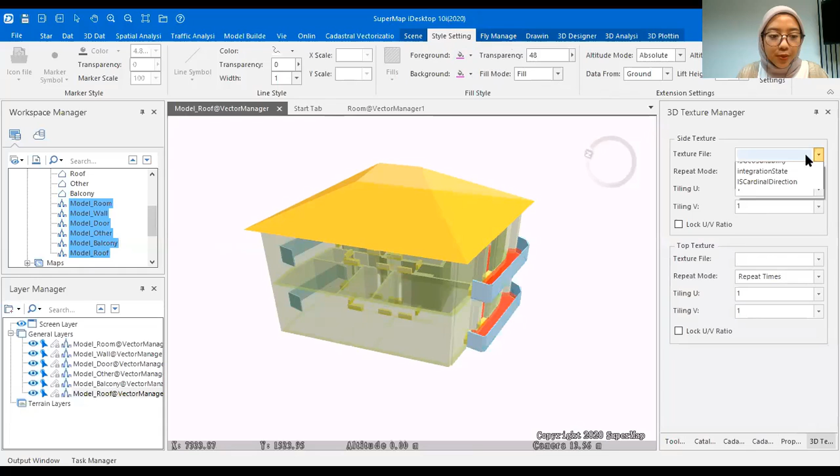And also you will be able to put some texture setting on it in case you have your own texture for the building. You could put it here. You could select the file. As long as your file is in the format of these screen pictures, you could use that for the texture setting. And after it's finished, you could just save the scene.

And now, every time you're willing to open your scene, you just open your scene in the iDesktop, and it will give you the visualization of your scene.

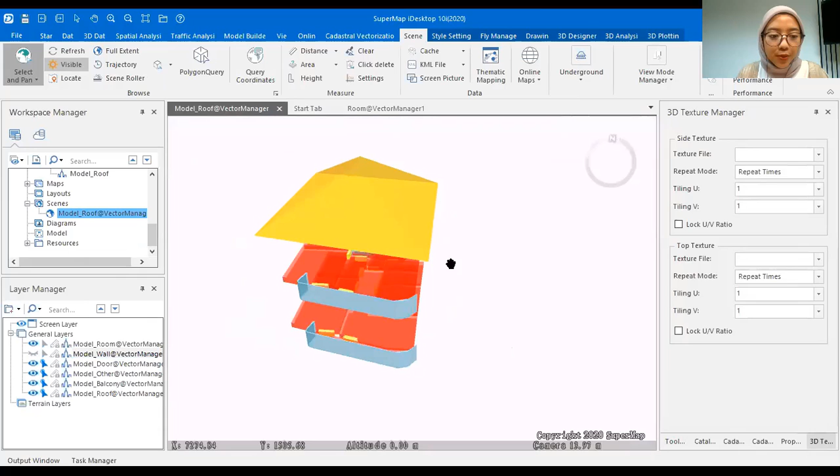Actually, we could also define the location information of this model. Because in the previous step we have not defined any coordinate information of it, only the coordinate system, but not the exact location. But if you have reference data, either reference points or a reference area for the location information of your building, you could use this drawing location registration.

It will ask you to do the registration between your data and your reference data. It's kind of doing registration, georeferencing, and the result is you will obtain your model correctly located in the exact location.

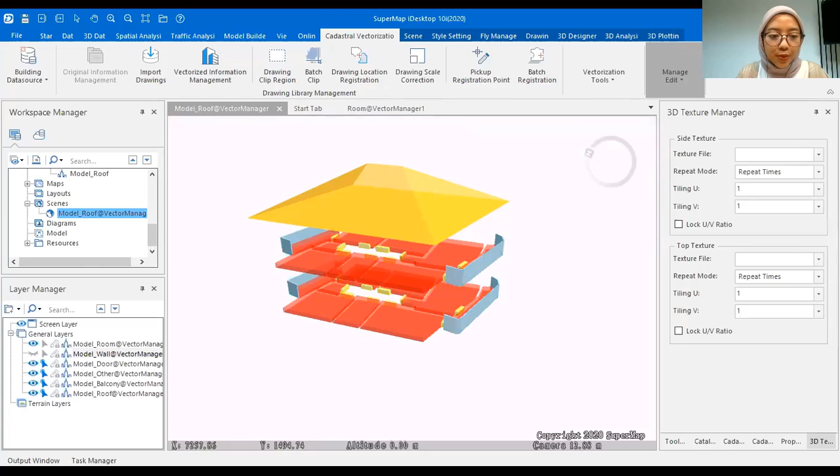Okay, so I think that's all for today's session about this 3D model making by using the cadastral vectorization in the SuperMap iDesktop. Now I will go back to my presentation. Let's wait. Okay.

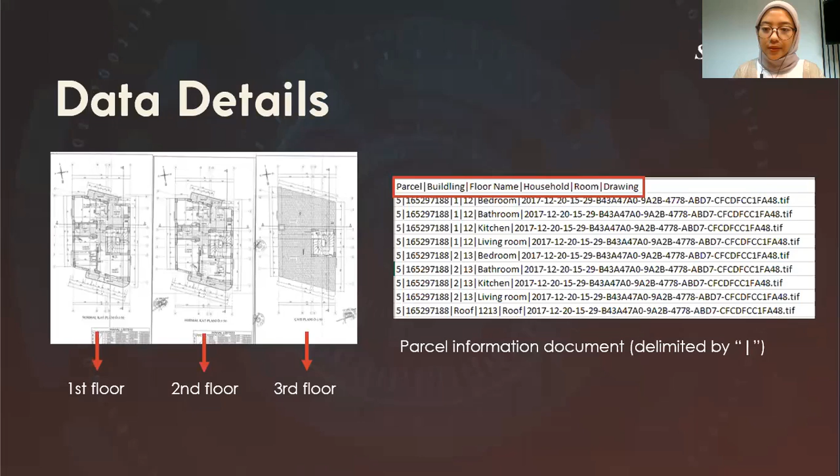And it will be very helpful for you to share it with other users, such as your supervisor, your client, etc., and they will access the 3D model that we have created before in the SuperMap iDesktop. We will share it into a web application.

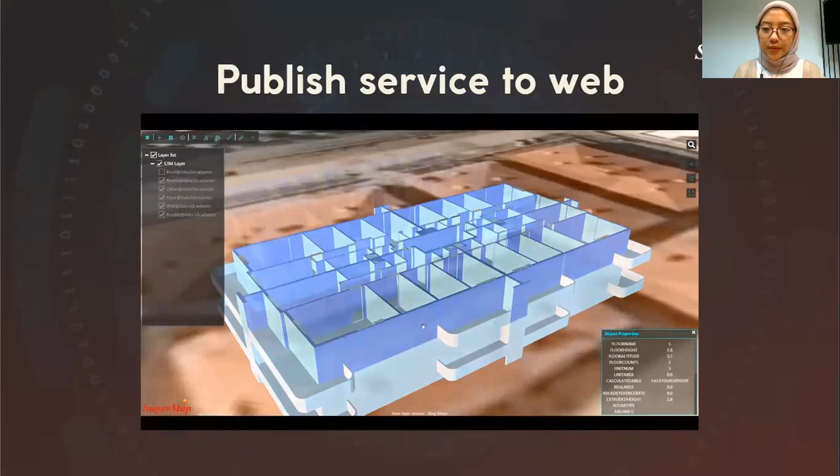And another thing is that you will not only be able to publish it as a GIS service on the web, but of course you could add some spatial analysis functions on it in your website application, adopted from the SuperMap iDesktop. This one is the feature analysis, skyline, etc.

And also we have the capability to do legality checks. This is not provided in our desktop terminal product. You need to do further development in order to obtain this legality check analysis. Here, you could do some analysis vertically and horizontally to know which area violated the rule. And this will be very useful to implement the building boundary legal aspects both horizontally and vertically.

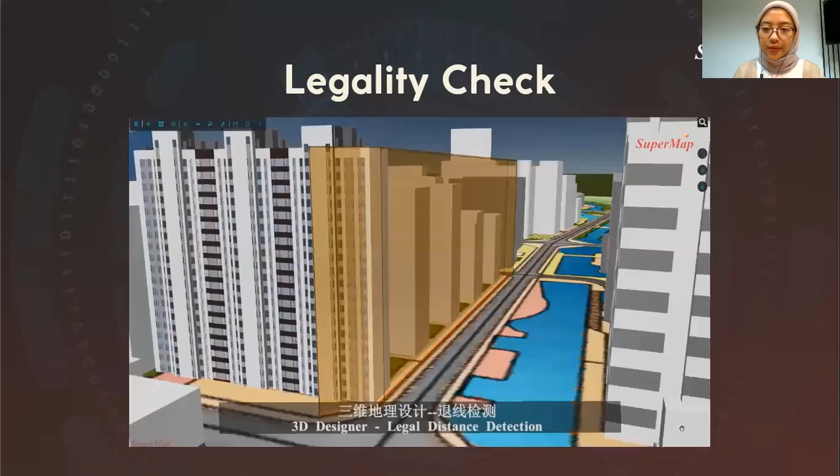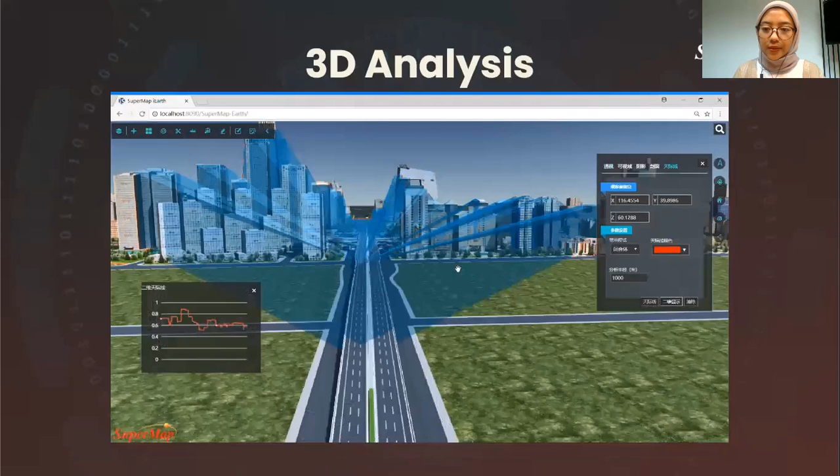And also, yes, about the 3D analysis. One of SuperMap's very impressive capabilities is handling 3D data. After our software consumes the data, we also provide many kinds of 3D spatial analysis that could be implemented on your 3D data, as displayed in this slide.

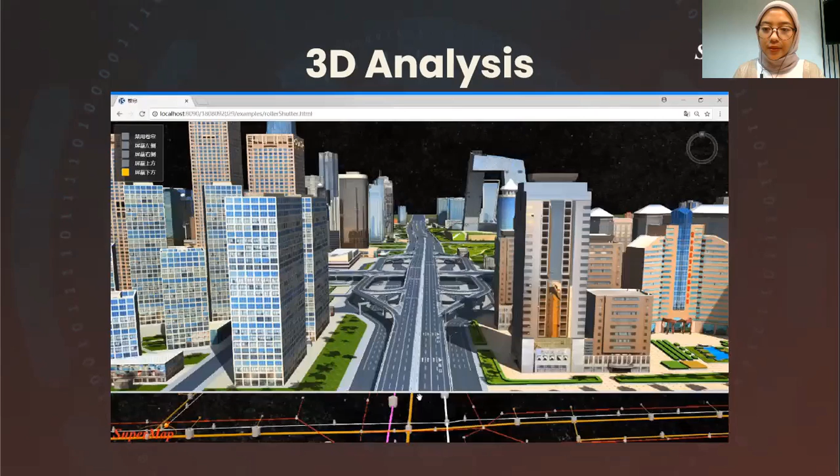Besides its functionalities in the desktop terminal, you are also allowed to bring the spatial analysis into a cloud-based application, such as skyline analysis, profile creation, viewshed analysis, etc. It could be applied in a web-based application for your 3D cadastral model, of course.